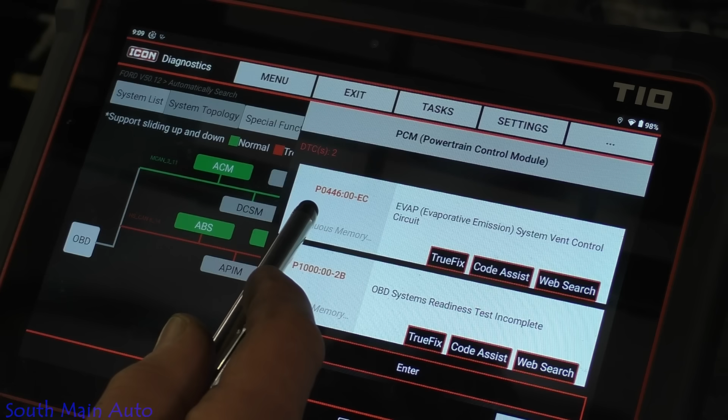We'll just go to the PCM because we only have the one code here. Let's see... classic P1000, so the light's been reset. And a 446 vent control circuit, so it's a circuit code. All right, so that should be pretty easy.

Oh, wrong button here, or click enter. We'll go in here. I don't think live data is going to be much help. I don't know why they put a purge on it. Maybe it had multiple issues. Let me get into some live data, see what we see.

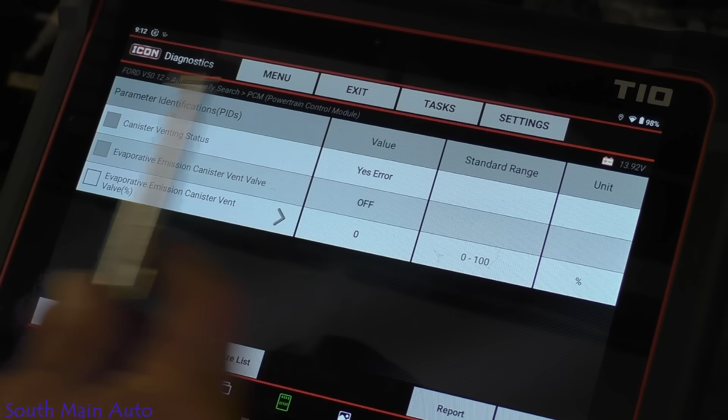Let's see what we got for the vent status. I don't think they show any circuit data here—oh yeah, it does. Vent status, yes, error—that's what I was looking for, to see if they had a circuit checking data PID. It's turned off, so I believe that is underneath the vehicle on this one. We don't do a lot of Ford evaps, but they're similar to GM, purge and vent. So let's get under there.

We should also find a wiring diagram. Let me see if I can get us that.

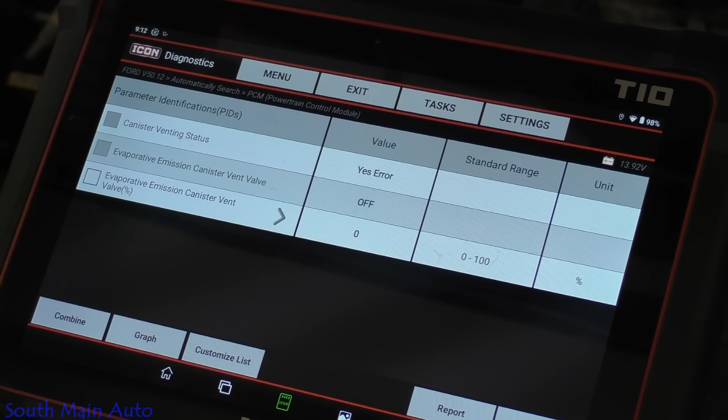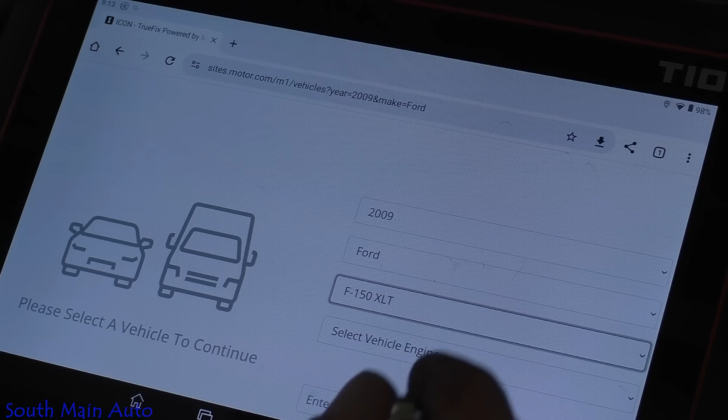We'll use the service data here that comes with it. I think it's a 5.0 in it. Am I wrong? Oh yeah, no, this thing's too old. Idiot. Let me see which one it is. VIN W, so it's a 4.6. You can't trust this guy—I don't even know what a 5.0 looks like.

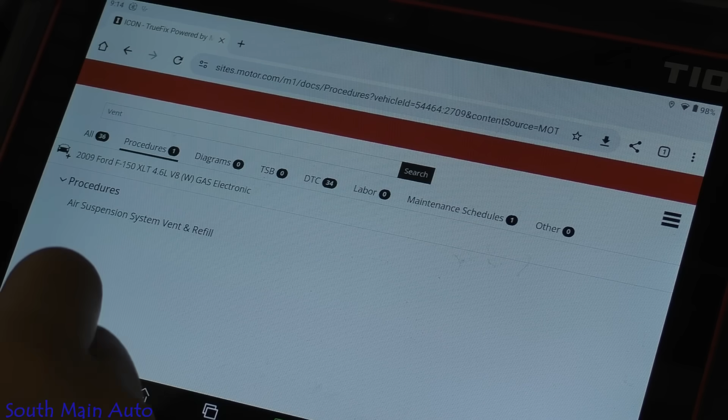And then we're gonna come here, we'll just use the search. Let's do vent valve—oops. We'll just try vent. I usually try to keep my searches generic here. Diagrams, none. Procedures, try this.

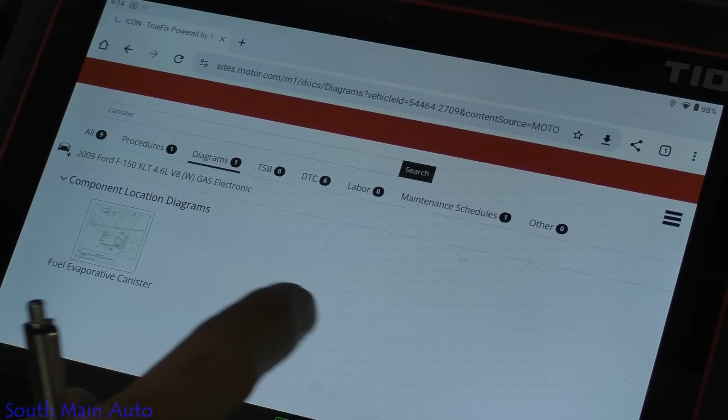Diagrams—oh, we got a component locator. We're gonna have to probably be a little more generic here. It must be going through an update because it's being kind of slow today. I think we're locked up. Whoa, nope, hang on, dude.

Okay, what do we have here? Canister assembly, canister vent valve electrical connector. Oh okay, so it's built right into the end of the canister. All right, so now we know what we're looking for when we go in there.

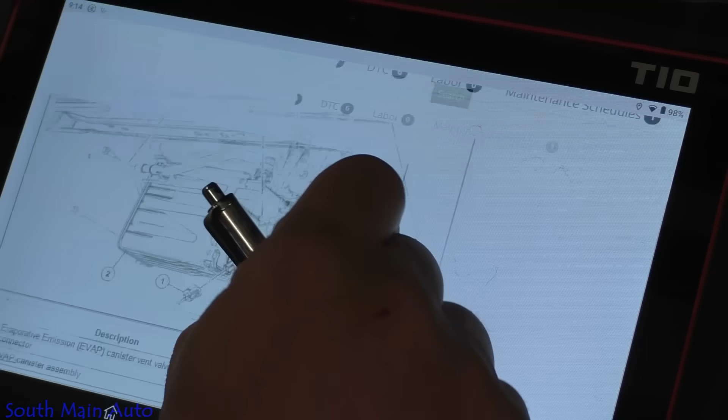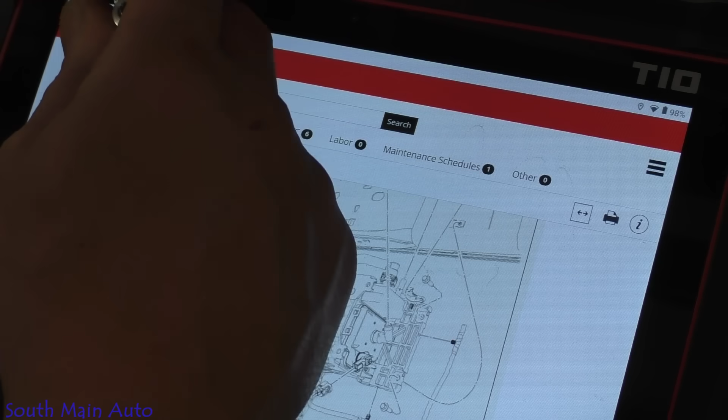Let me poke around here and get us a wiring diagram so we know if it's full-time power or how the computer controls it. If it's full-time ground, I'm not sure right offhand. Let me find it here for us.

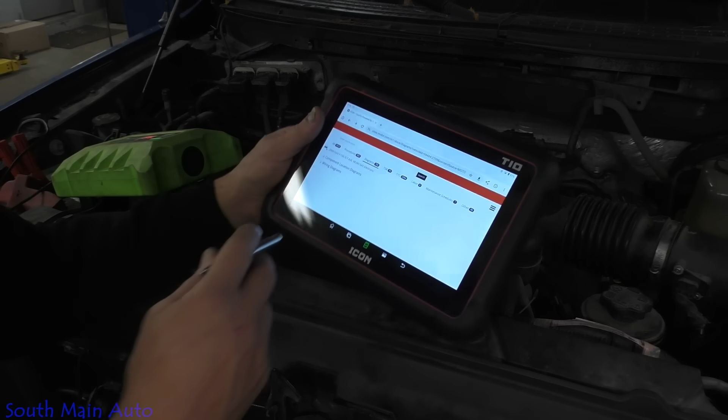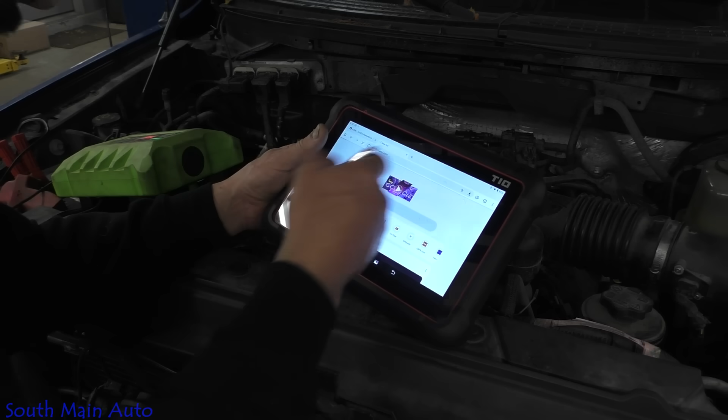So I went through all of the wiring diagrams here, which are pretty incomplete. This is the issue I've had with Motor service data in the past. I've tried it, and I've always found it to be very lacking. Granted, it comes with this tool for free. Autel has used Motor service info. I've always found it very difficult to navigate because they don't use categories and subcategories—everything is search derived, and it's oftentimes very incomplete. Sometimes it's helpful, but more often than not I find it quite incomplete. So I'm just going to pop into ProDemand here and we'll get what we need.

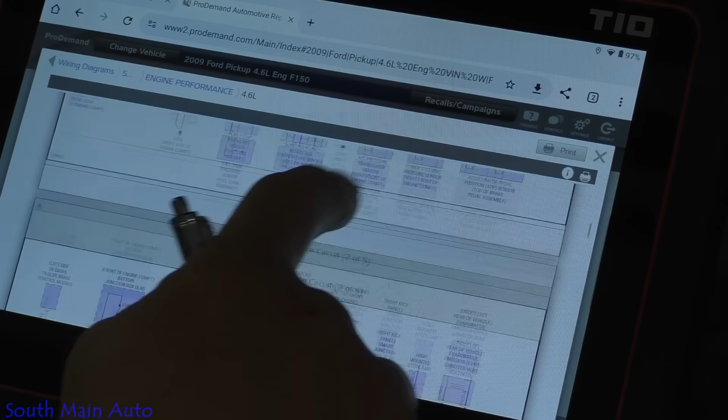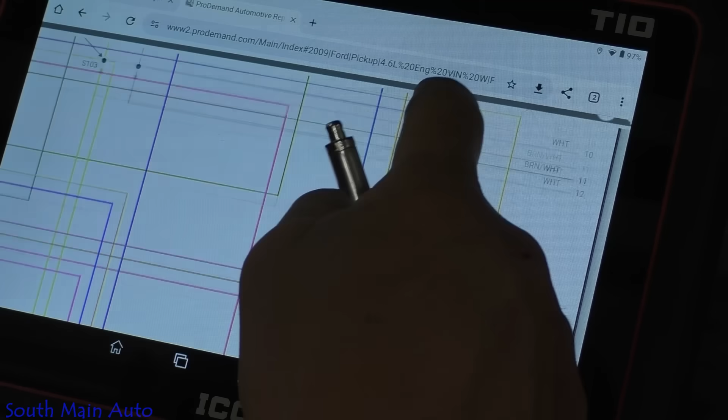Okay, evap vent solenoid right here, 2 wires: yellow-red, green-blue. They come down, number 5, number 7, so we'll go back to this diagram. Number 5 goes up to this fuse 26, 10 amp, which is also the power side for the PCM relay. So we do not need to check the fuse. It also comes down, and it's also the feed to the keep alive power.

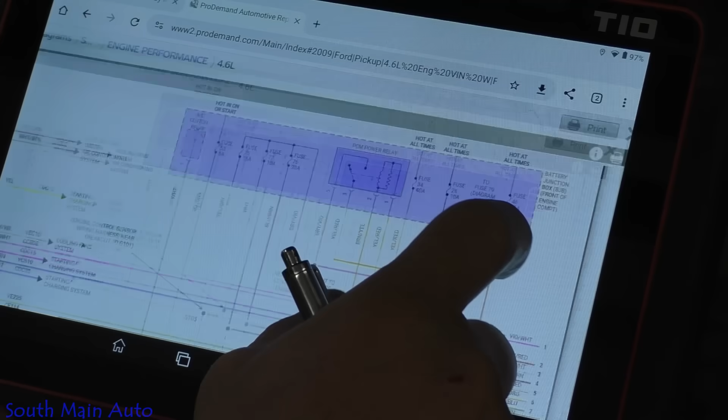AC pressure transducer—oh no, it's not AC pressure transducer. Okay, yeah, so we don't have to check the fuse. If the fuse didn't work, then the PCM power relay wouldn't turn on, or keep alive memory would be erased, therefore the engine light wouldn't be on.

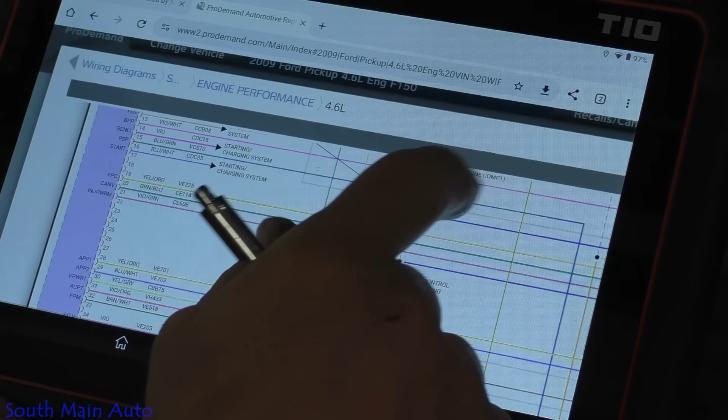And then number 7 goes over to here, CAN V. So it is ground side switched, as we likely could have assumed. Full-time power comes in on yellow with red, and then green with blue. That's all we need to know.

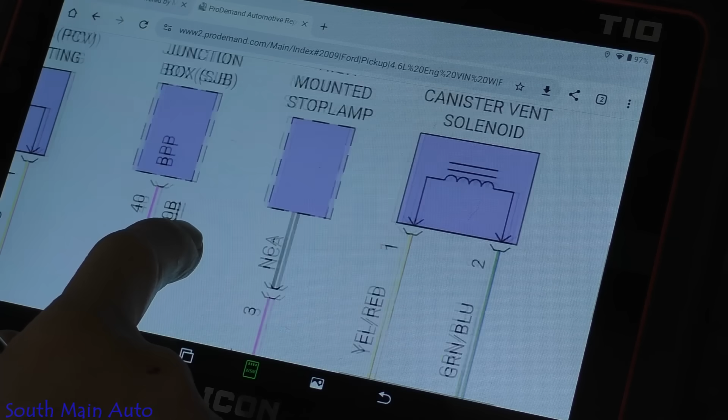Yellow, red's our power. Green with blue is our control. Let's get it up in the air and see which one of those two we're missing, if any.

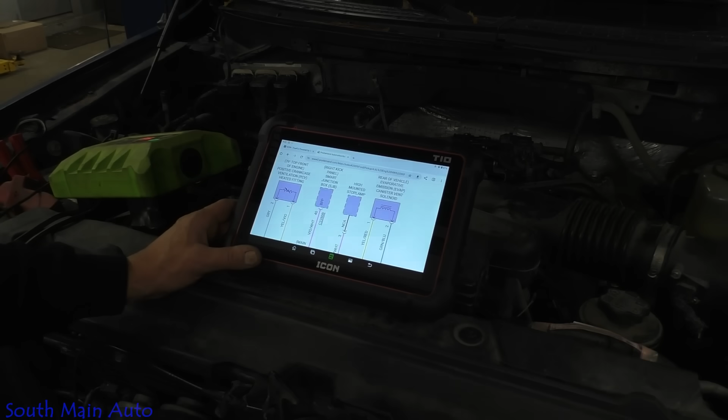I assume this vent is probably new, unless they confused the vent valve with the purge valve, I guess. Anything is possible, it's 2024. As suspected, it looks brand new.

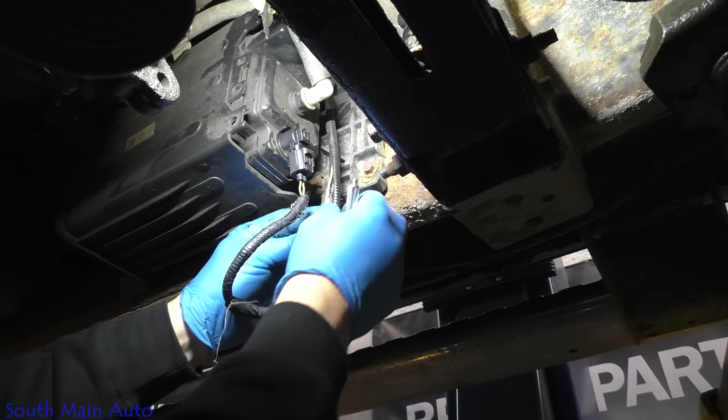Wiring's hanging down. We see we have a couple splice connections here. We can notice also crimp and seal connectors. They were crimped with the wrong tool, so both of them have holes in them, so they'll be big green puss sacks here in about 6 months in the proper place.

On the scan tool, I've got the canister vent valve pulled up here. Let's just turn it on and off, see if we hear anything. That's on, that's off. On, off. Okay, so we don't hear anything, so now we can unplug it.

Connector looks pretty good. I don't have a pin in my hat, so we'll see. I grabbed us the power probe tool. Probably not the best tool for the job, but if we have to find a power source under here, it makes it easier.

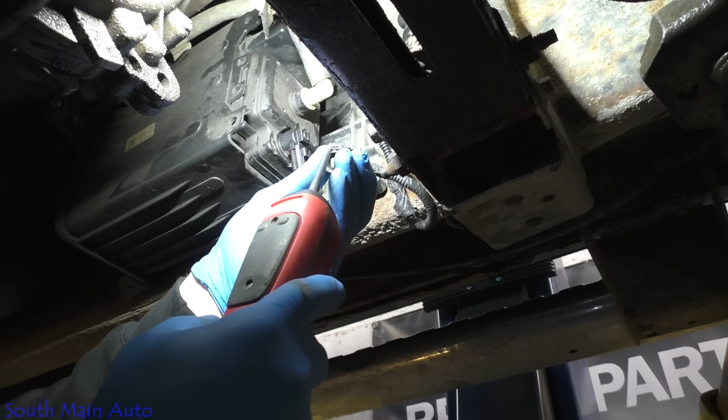Okay, so we have power there. This is the PCM side. It does not appear we have any connection whatsoever with anything.

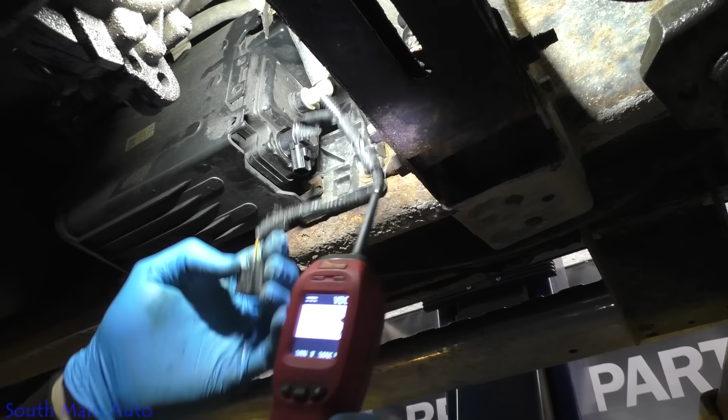Okay, so the power probe does, you can use it for this. You go here, it's been a while. We're gonna go to driver test, okay? I don't know if that's showing up on your screen or not. We'll go to driver test.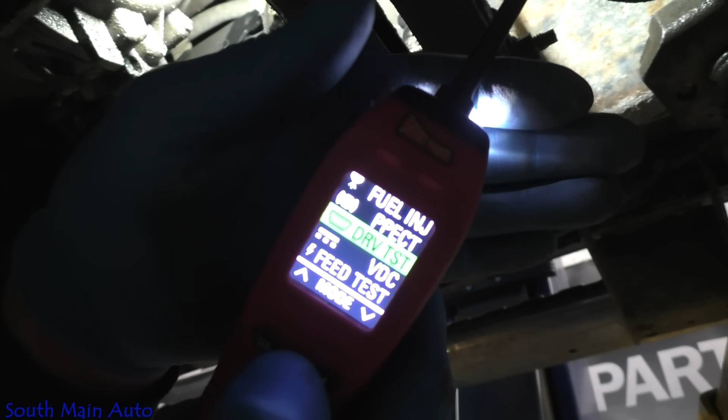That puts our battery voltage, which we have a maintainer on it right now, and it's a low current output. What it does is we can use it on ground side switch solenoids like this, so when the PCM grounds it, we'll see it.

So we can put it there, but we know we have no connection. We have an open circuit here, we have a broken wire somewhere. Turn it on. It's turned on, and our voltage did not pull down to ground. So we have a broken wire, easy peasy. Or the main brain box is bad.

Rule number 1, when looking for the broken wire, visual inspection naturally, which you kind of seen there. Visual inspection says you got a bunch of new tape here, so I don't know what that means.

It is worth looking just in case there's one of those butt connectors in here. The butt connectors are great, we've made videos on crimp and seal connectors. They work wonderful when used properly. If you use the wrong crimping tool, that's what you get - you get a hole poked in it, and then it's junk.

I don't know what's going on here. Maybe they just taped it up. They didn't cut the tail off their zip tie. Clutch mode, we're gonna take that off. That's the Harbor Freight tape. All right, get off my glove.

Let's just have a look. I don't feel any wire nuts. Of course, we'll tape this up. We'll have to fix those other 2 wires there, obviously. Not our customer, but kind of is, I guess.

Okay, so nothing weird here. They must have just taped it up just because. Always worth looking, though.

All right. Being that we have to fix these 2, let's just do the hokey pokey, and by that I mean let's just peel back the insulation. Wow, grade A scumbag move right here, watch this. It's only a scumbag move if you leave it.

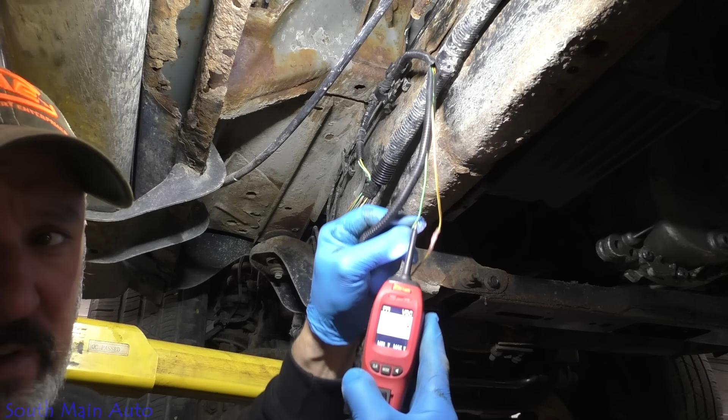Turn this back on. So still no connection there. I'm gonna switch back modes to volts DC. Typically, if it's hooked to the computer, we'll see some sort of ghost voltage, some sort of reading. Okay.

I'm gonna continue my visual inspection on this harness. We'll leave all this junk here because like I say, we have to fix that. If you guys don't know what I'm talking about, let me enhance. Nothing to do with the video. Enhance.

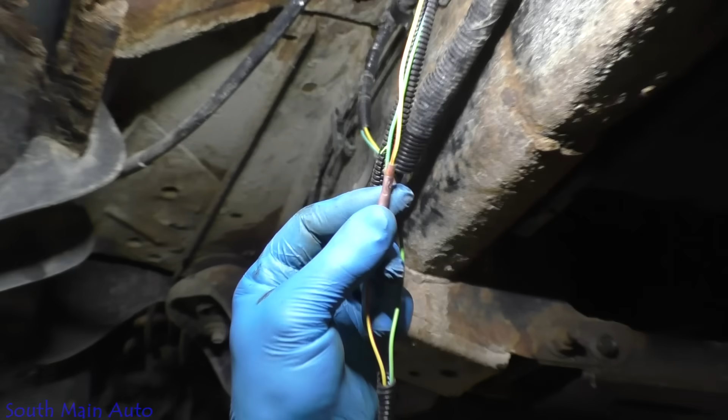Get these to focus for you here. See them 2 poke holes through there? That makes these connections absolutely worthless. It's what gives these crimp and seal connectors a bad name. Great way to ruin a wire is using the non-insulated portion of their crimping tool. That's what causes that, so it makes some junk.

All right, the harness comes up to this connector here. Now, there is some fresh tape in this area.

Pin 13 at this connector, it's green, that's blue, this is pin 13 in between the orange, white and orange, and green and white. We're just gonna very gingerly back probe it here. I did plug the vent valve back in, so if the wire's good from down there to up here, we will have 12 volts on this.

And we have no volts on this. So that's interesting, but we do have some ghost voltage, which is a big clue for us, okay?

Let's turn the vent valve on. I still have my ghost voltage. Let's go back to the driver test.

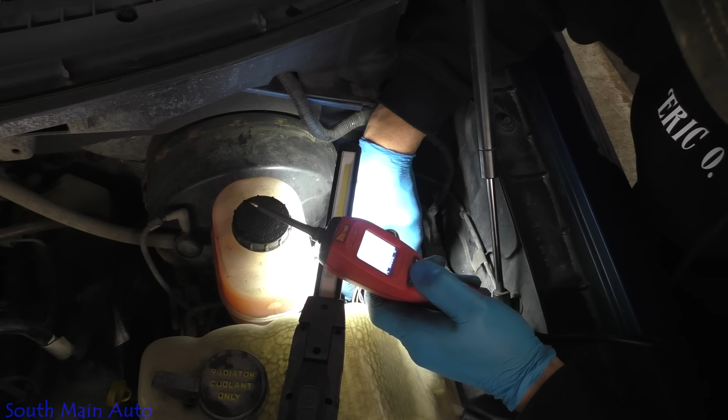Okay, that's on, that's off. So our wire is good up until this point. We have 13.7 volts here. We're going to use a computer to pull that to ground.

That's interesting, because that harness didn't look that bad on the way down. I didn't see where anybody had meddled with it.

Let's find pin 13 on the opposite side. So we are 1, 2, 3, 4, 5 over in the second row up. Should be this guy right here. Kind of a lighter green.

Why we do this is to make sure that the connector is good, right, without unplugging it. Sometimes you can open up Pandora's box here. So you don't mess with connectors unless you have to, okay? General rule.

The truck drove in, sometimes you unplug a connector, you gotta push it back out. And I don't feel like pushing it out because I got stuff to do.

On, off. Okay, so we've isolated the circuit. Not a problem, easy to fix now. We just need to find it.

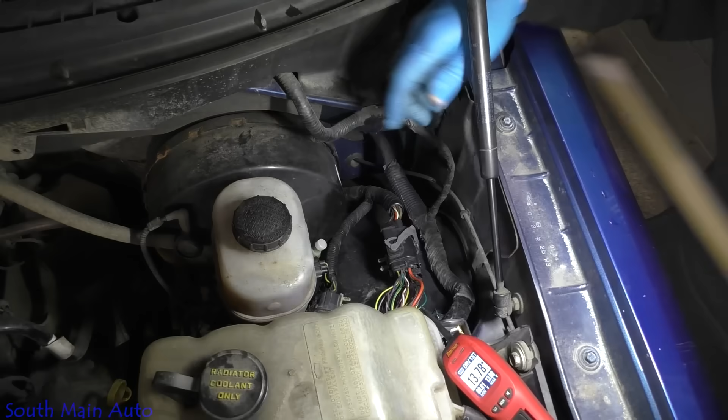And the wire is broke between this connector and down under the vehicle. I'll give you a reference here. I know the lighting kind of sucks, but Brake Master, we're up in the left-hand corner of the truck.

So let me employ my big nose, do some sniffing. I see all the wiring harness. This thing was pulled out when I got up here. That one wasn't pushed in where it was supposed to be. This one was not pushed in where it's supposed to be. This one down here is not pushed in. So somebody has been meddling in things they ought not be meddling in.

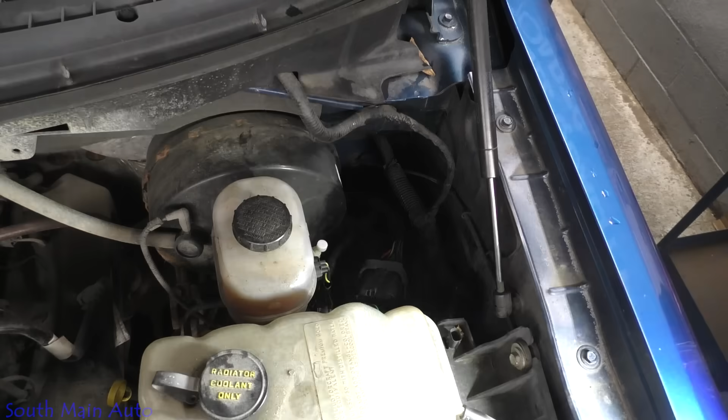So let's go look for some rubbing and see if we can find the green corrosion. I'm gonna pick a random spot here in the middle. I see this holder here is broke off.

Usually you see the tape's kind of boogered up. A lot of times that happens and the dirt and stuff will sit down in here and kind of give some chafing, in my experience. So we'll very lightly do this. Oh yeah, lots of dirt. Doesn't mean that's where the problem is, but we like to go with high probability areas.

Follow the sign. Lots of dirt and junk there. No big green corrosion balls pointing out at us, jumping out to us. Come on, green corrosion, where are you?

Let's see if we can find the wire. Let me get a reminder of what it looks like up here. It is light green with like a light blue is what it looks like on this end. Here's a light green with a light blue. Give it a tug, that's pulling all the way through that direction.

Oh, pulled it right to your problem, lady. Oh, damn it, I robbed you guys of the money shot. We got her, old son. So the old tug test worked, just didn't tug hard enough, so there it is.

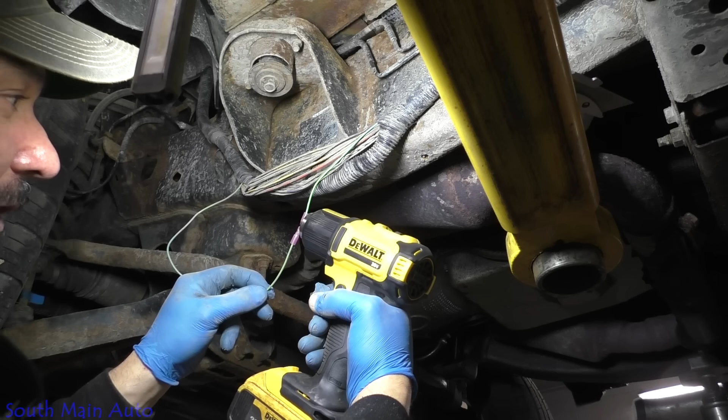I've used it for some tire repair so far, but never heat shrinking. I always use my little mini torch. Perhaps this is not the appropriate tool. It does have a little guard that goes over it. We'll try the little reflector on there.

Well, let me grab my mini torch. Maybe it works better on just like regular heat shrink. Still a cool tool regardless.

Like I say, it works great if you're patching a tire and it's getting cold out, you need to heat up the tire a little bit for your vulcanizing fluid. Usually I use a woman's hair dryer that we get at the Salvo or whatever. Our last one just broke, so it was good timing.

There we go, we'll let that baby cool down. I opened up the tape to the original scene of the crime, and guess what? Guess what, chicken butt? Nothing.

We got some tape here. I see lots of green pus. Oh yeah, we got other broken wires. Well, not other broken ones, but we got other pussy ones.

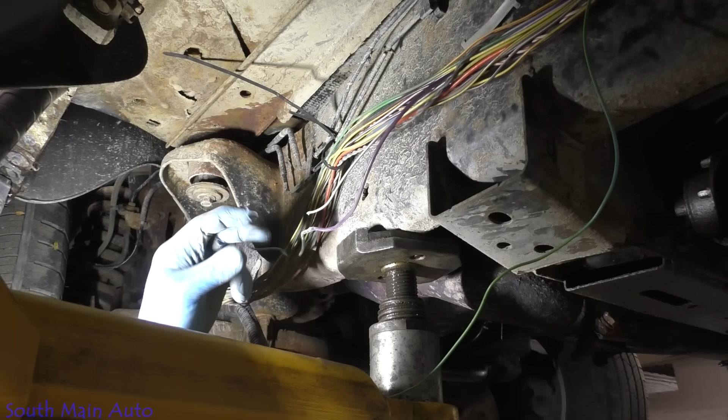Before we cut the other one, because the other one's a big jabroni, and that may be a power wire of some sort. Don't know. All I know is they need to be fixed.

We'll use the red crimp seal again. It's not a big deal. If you do poke the insulation on it, just cut it off and do it again, if you have enough wire. If you're in a risky situation where you know if it screws up you won't have enough wire, then fix it a different way.

Open barrel connector with heat shrink, or you can solder it, or as they say across the pond, solder. Okay, keep all our viewers happy.

Got a little mini torch here, heat her up. These are the marine grade ones I use, they have the adhesive in them. Heat them up till the adhesive comes out and you're good to go.

Now this one, this purple one, I don't even know if we're in the frame. This one I look at and say, girl, you crusty. Oh yeah, let me see if I can give you some sort of money shot. I wonder what it runs. Try to get her pinched.

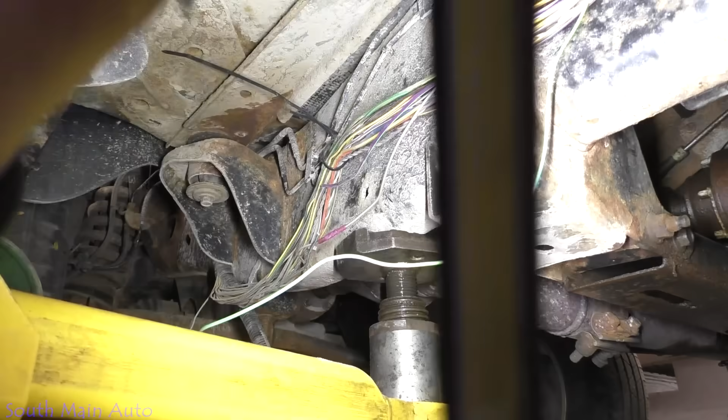Gonna be though. Where did I have the light hanging? Ain't much to attach it to under here. She's pretty crusty. Well, I was going to do that purple with green, and I looked up and caught a little tiny twinkle of light in my eye. There was a teeny tiny piece of copper sticking out of this wire that we supposedly already inspected. He's a guy that should put his glasses on.

There's that. Okay, now I was seeing which size we need for that one. I'm guessing blue. You betcha. Probably should go get the appropriate tool here, but here we are. Slipped right in.

There it is. Let me heat them up. We'll call it a day. Good thing we tugged on this harness. Look what kind of sin this just revealed. Your classic.

Never ever use a New York style butt connector. Ever in your life. Unless you're a grade A scumbag. Those things won't last 6 months around here.

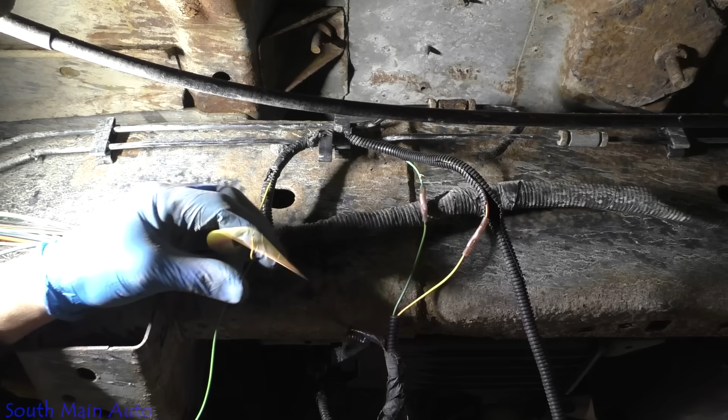This poor harness, it's gonna have some splicages in it. Our splices, I guarantee, with the unlimited limited warranty. I know my splices aren't gonna fail, so that's all we worry about. So we'll fix what we see.

There's that. I believe we have everything fixed that needs to be fixed. I put a little tape on the harness just to make sure our wire lengths and everything were correct. We're gonna get this taped back up in the loom. Take the blow nozzle, knock some of this stuff off, and then reattach it to the wire holders here. And then I went ahead and replaced those two butt connectors there and evened out our wire lengths on this, and we'll get this all taped up.

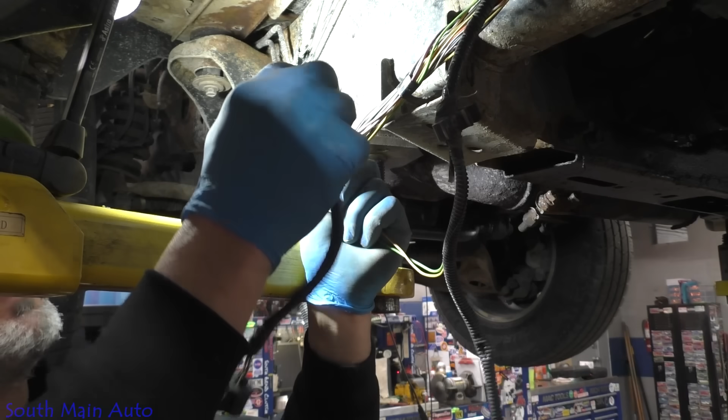When you're using crimping seals, just scrutinize them. You have to be honest with yourself. If you live in the South, who cares? Poke as many holes as you want. If you live in the salt belt, you can't have a single, even the tiniest little hole. Salt will win every single day of the week.

We got her all done up. And then the best way to attach your harness back to the little holders, because the problem is if you try to take those holders out of the frame, then you're in big trouble. You're in big trouble, mister.

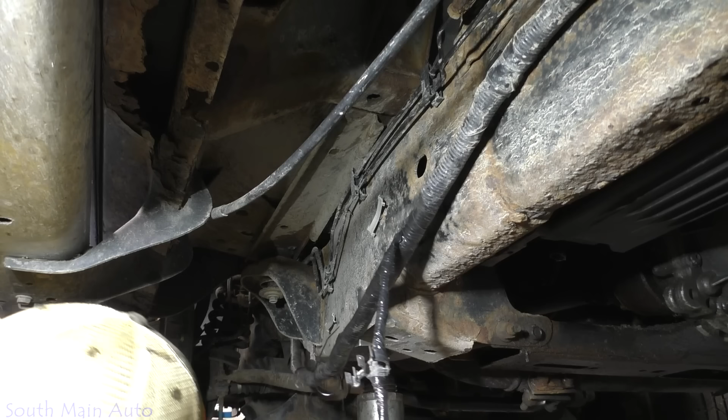Oh crap, the OCD guys, we'll move that one to the front. We'll move it to the front. I almost want to cut it back off, but I'm not gonna. I'm gonna control myself. Move those two on down the line. We're gonna have one oddball zip tie. You're gonna have to live with it.

Almost did it again. Look at this guy. What's this rookie of the year he's going for? Stick him back up there. Flip it over. Let the harness be what it'll be. Get it where we need it. Pull it back just a little bit.

You can't just leave your harness hanging, folks. Bad things can happen. Bad things happen to good people. And then we've got this. We'll hook that back on the brake line. Sling the wires up and ring them.

We're gonna have to find a place over here because I see it was missing a holder on this side as well. Well, we're gonna get her as factory as we can. The thing is, he goes to the car show with this thing. It'll be points off. They're already gonna see the zip ties, so that's probably a couple points. But as far as this oddball zip tie here, the one that's upside down, I don't know. Could be the difference between him and a 24th place trophy, I know that. But chance you take.

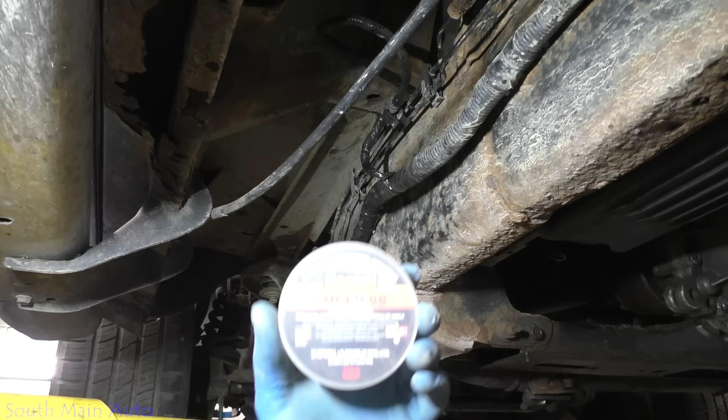We did wrap it nicely using the Scotch Super 88. Don't mess around with crappy tape, folks, that's all I can tell you. Spend the extra $2 and buy Scotch brand tape. Either get Super 33 or Super 88. I wouldn't lie to you, it's the best stuff on the planet.

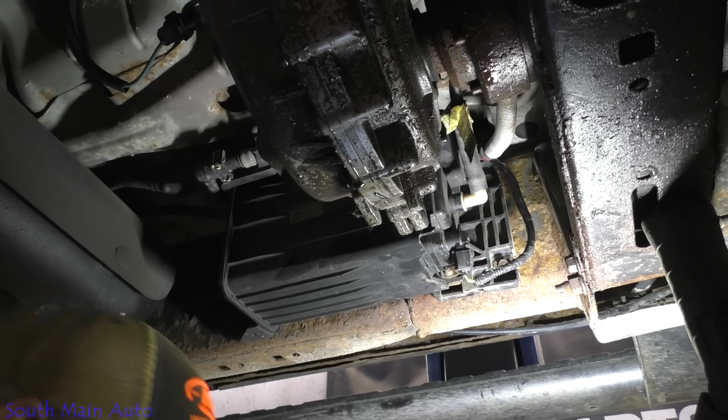We are back to the beginning where we started. Listen closely. On, off, on, off. So that's good. We can go back. We'll take our scan tool here. And now if we go back to our data stream, we go to custom, oh, let me turn you.

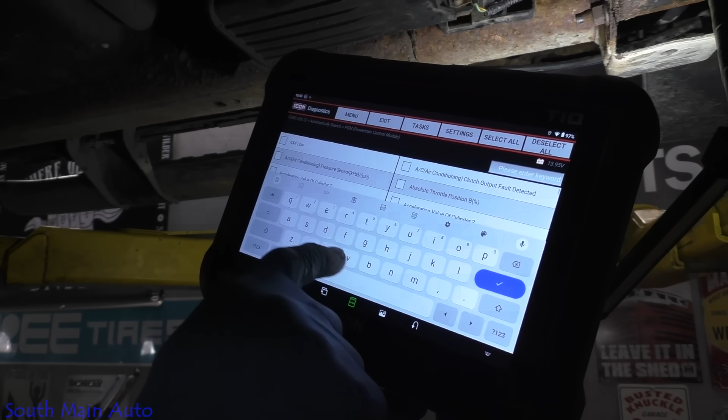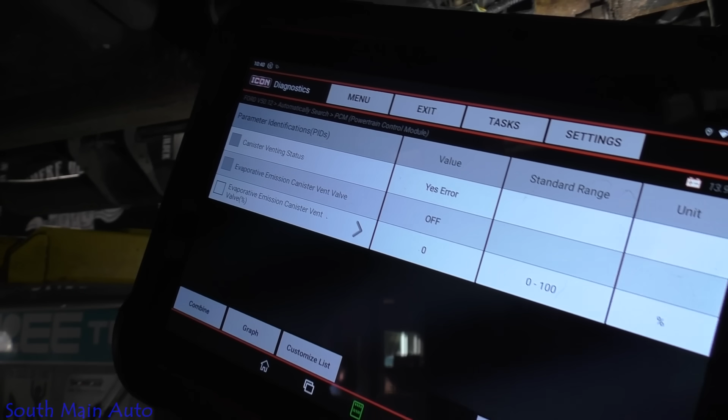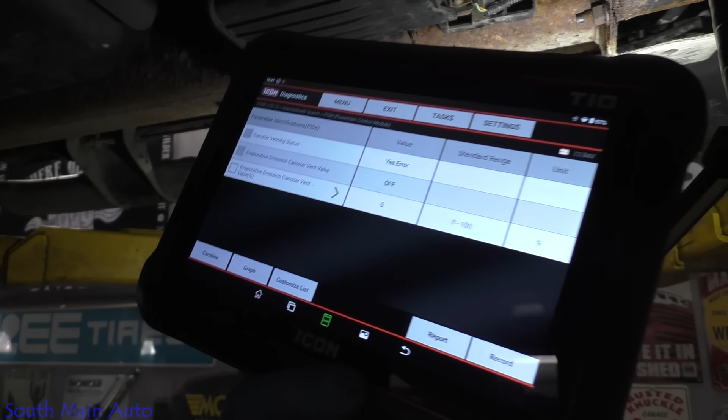Hang on, customize data list. Deselect all. We will search for vent because the vent is our friend. We'll push the down arrow thingy. We'll hit OK. Canister venting status, yes error. What the world? Why would it say that? It clearly works, so that's curious. I don't know why it says that. We'll need to check it out. Maybe that data bit is erroneous. Let's back out of here and clear our fault memory.

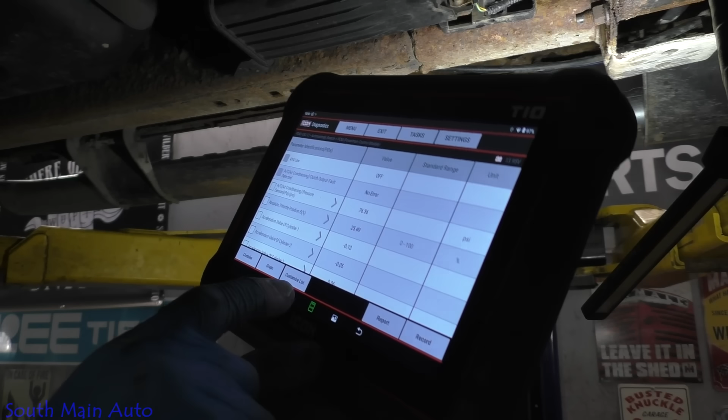Rookie mistake this guy just did. We did not check the drive cycle status prior to clearing. We know it wasn't done at a P1000.

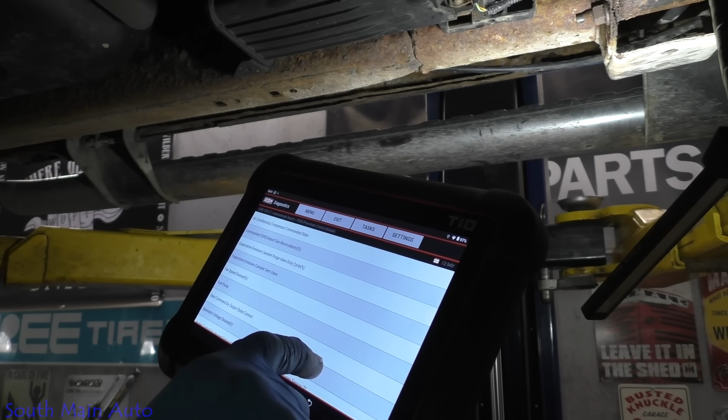So that's interesting, it says yes error. What if we go to actuation test and then go to vent valve? I don't think we can select data, can we? Because perhaps that PID changes. No, we can't. Oh yeah, add data streams.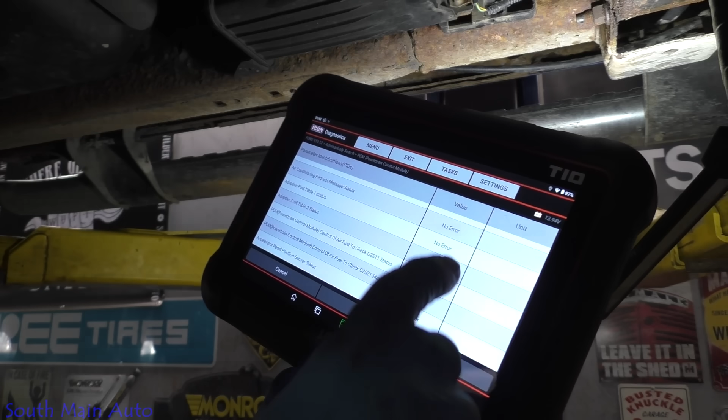Number 20, this usually doesn't work on the Icon. Yep, it does not work. So it gives us 20 data PIDs, but it does not let us select them. I've reported this issue to them. I ran into this same issue yesterday on a Dodge. So yeah, it kind of sucks. It just brings up the first 20 erroneous data PIDs, doesn't give us the ability to select 20 of them.

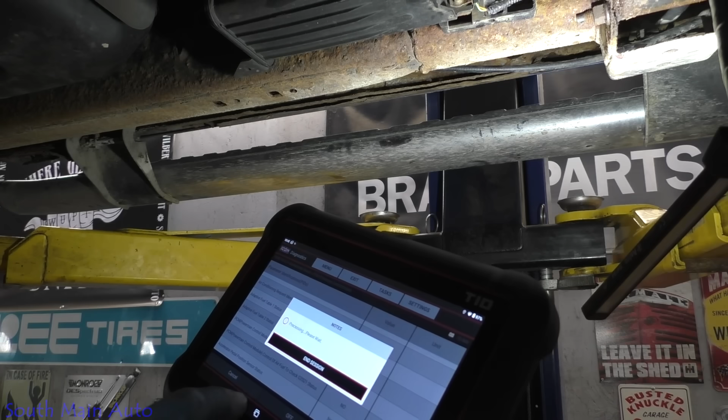At any rate, we know that it works because we hear it click. The circuit is complete and the car has control of it. That's it, so we'll leave it at that, folks. I'll clean up my mess, just a bunch of tape and stuff, but an easy fix. Super easy circuit, two wires, a power and a control.

Perhaps the reason the other shop or other folks might struggle with this is just lack of service info. If you're running a shop and you don't have service info, you need it, or you just need to close your doors, because without service information we have nothing. You don't know what color wires go where, you don't know torque values, you don't know anything other than trial and error, which gets expensive after a while, I would imagine.

You need to know how something works before you fix it. And I'm not trying to throw shade at them, I got no static with this shop. They send me a ton of work, a lot of them do. But you have to have service info. It's a very simple process: look it up, where does the wire go, and why isn't it working?

Also, when you're making your tests, you need to know the values or what you expect to see. When we get down there to check the power wire, does this power wire have power all the time? Is it key on? What brings this thing power? Does it run off a relay? Then make your test, what do you expect to see? Well, it comes from a 10 amp fuse, we should be able to check it with a high current test light to see can it carry current down that wire. And then the same with the control side, how does it work? It's a ground side switch, obviously, it comes from the PCM. Do we have bidirectional control?